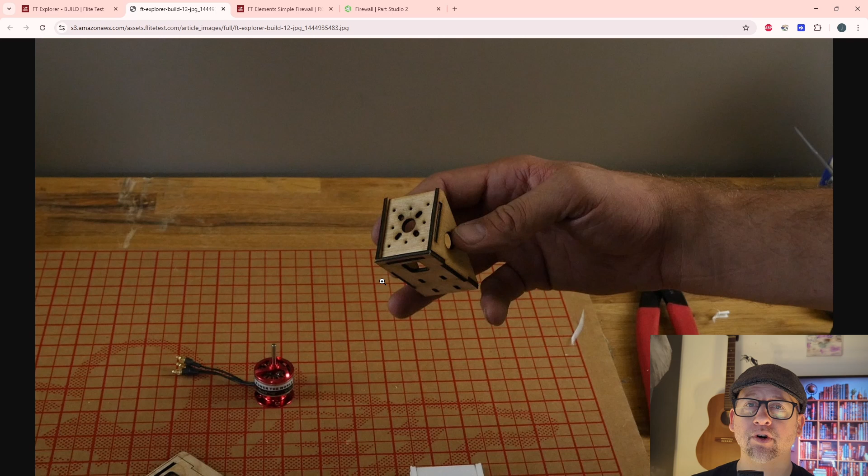There are some caveats to this. Heat may be generated from the motor and may cause the 3D printed firewall to melt. So we want to make sure we print this out of a material that can withstand the heat, or we need to create some air ducts around this in the fuselage of the plane to allow for airflow within the firewall and for the motor to get cooled down. I'm not sure if this is going to work, but I'm going to try it and test it out and 3D print this myself.

So I took the plans from one of their downloadable free Explorer planes, and this firewall is reusable in a lot of their platforms. So let's get started. Here we have OnShape free version, and if you want to download this file for free, you can grab it from OnShape. You just look for firewall and you should be able to find it. It should be under the public domain.

Okay, so now we're going to start on the front, and then we're going to create a sketch on the front view. We can hide the right and top view just by clicking on the eyeball for right and top view. Then we're going to click over here on the front, and get nice and centered. Now we're going to insert our image.

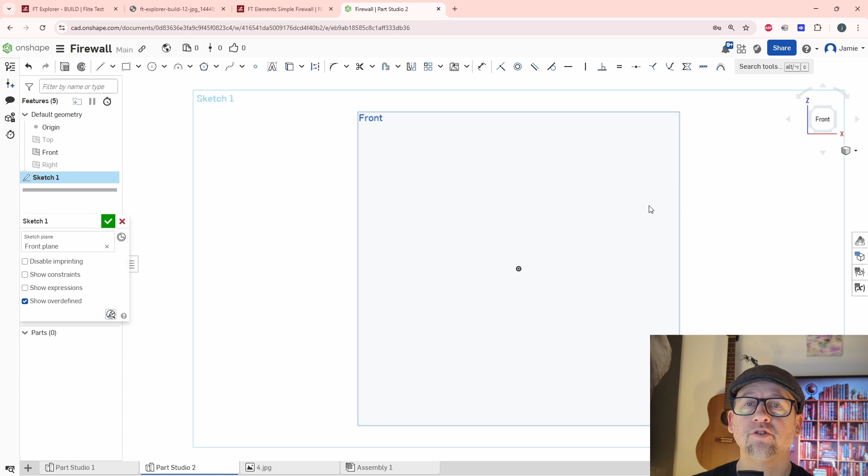So we're going to go up here to insert image. We'll go through here and look for import, and go with right here. It's going to be number 4, insert. So it inserts this item, a 2D image file from the Flite Test website.

So let's grab this guy right here. We did a copy right here. We're going to go down and click on this, and then click on this, and give it our approximate size.

And to scale this is how we will scale it. We will use the centimeters here. So this is 10 centimeters, so it's 100 millimeters. So I will create a line, and I will start with L for line.

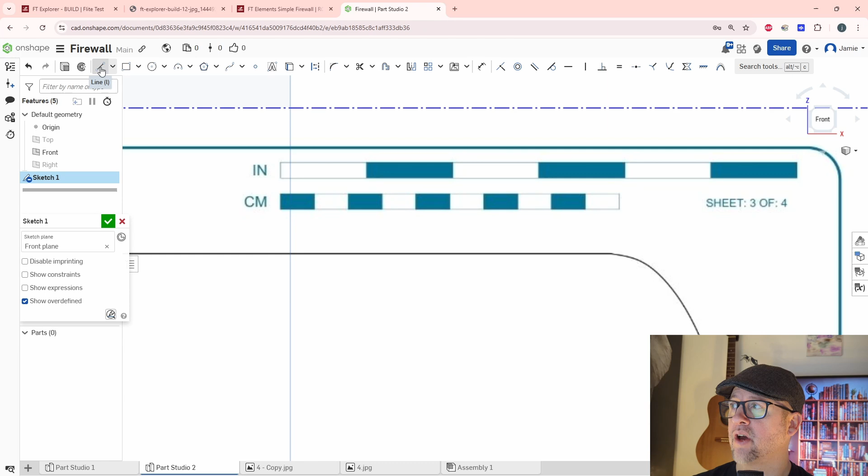So we can click that, or we can click L. I like to click L. So I'm going to hit L, create this line, and then we'll get off of it by clicking L. L to start it, create it, L to click off of it.

Okay, and now we're going to go with dimension. We go over here for dimension, hit D for a shortcut, or we can click on the thing. So here to here, and we know this is 100 millimeters. As soon as I do this, this item will scale, and we will see it looks much different now. So now we are at 100 millimeters, and our general size should be correctly scaled now.

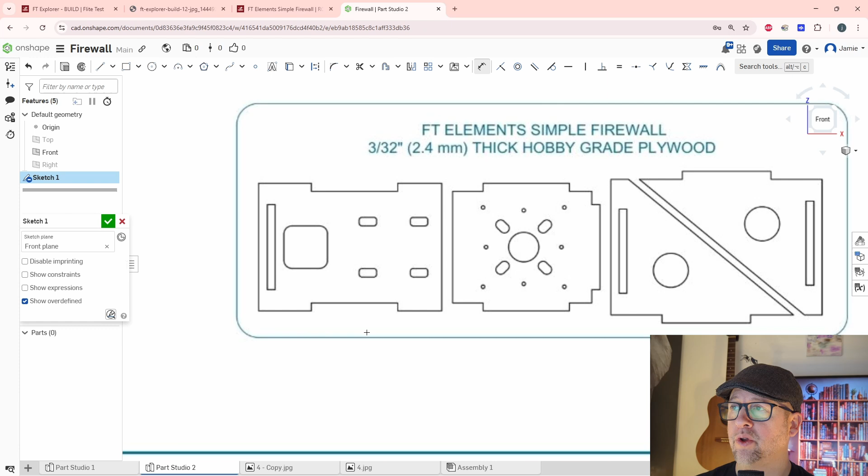Now we will go into the firewall. So this is 3 pieces of firewall. Originally they cut this out with plywood, but we'll be using 3D printed plastic. When I build this, all I gotta think about is this is kind of the bottom, and this is the sidewall right here. So let's look at that sidewall - the sidewall right here, then we got the bottom half. So we just need to build it together.

We don't have to build this exactly as it has here. I'd like to duplicate all of this, that would be nice. And then this here, we can just throw it in, that's not a big deal. That's just the sidewalls, so we can modify and make those any way we want.

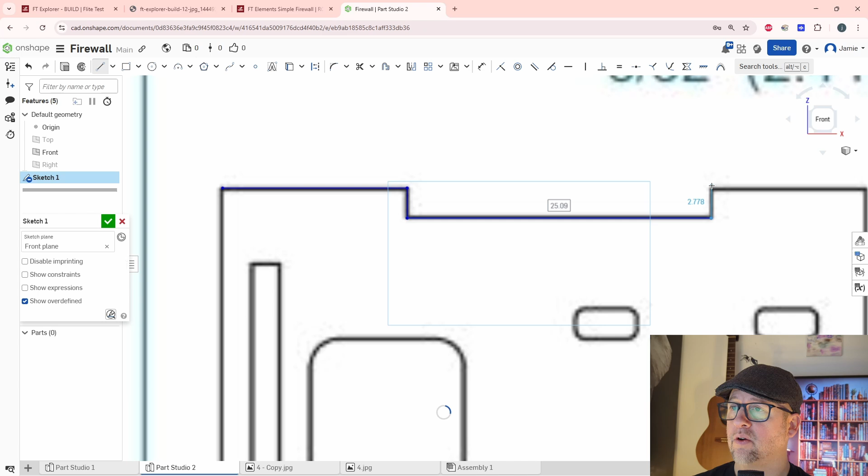Okay, so let's start with this guy right here. This is the very bottom, these probably are like mounting pads. So let's do a line, and we're going to just start with a line all the way around this guy, and we can just follow the contour of this, and we'll do like this. To make things a little more simple, I'm going to click out of this, L to click out of that. Then we're going to click L here, go all the way down.

Okay, get out of that. Now I'm going to create a center point, a center line. So this center line is going to go from here all the way over here.

And it doesn't actually look centered yet, so I'm going to grab this and find out the actual dimension size of this. So from here to here, and I'm going to divide it by 2.

38. Okay, and I want actually this to be the more precise one. This can move up, I'm not so worried about it.

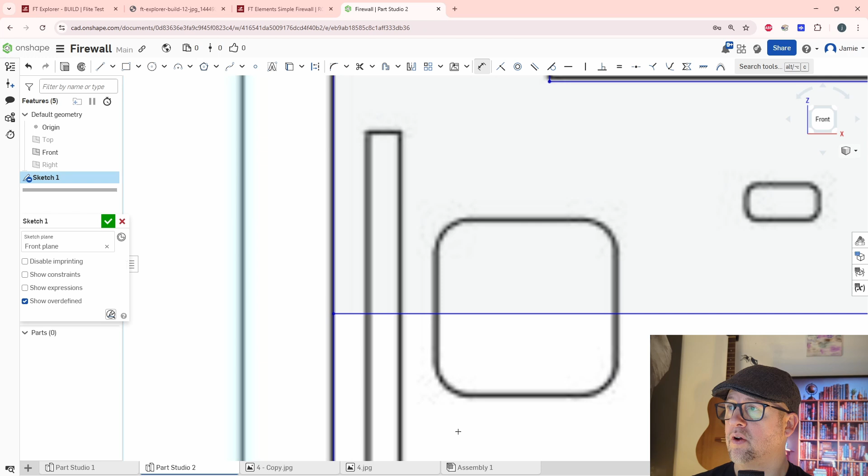This should be moving up. Come on, move up. Nope. I want this to move up. Let me click this line.

So as soon as this is in place, it will lock you down. It won't allow you to move anything. So uncheck that guy right there.

Okay, now I will do this, 38 divided by 2, and that will set this guy for me. Here to here. Here to here. Oh, it's thinking.

Let's give it a second. Okay, so we can put some basic math in here. 38 divided by 2, and it will automatically configure it for us.

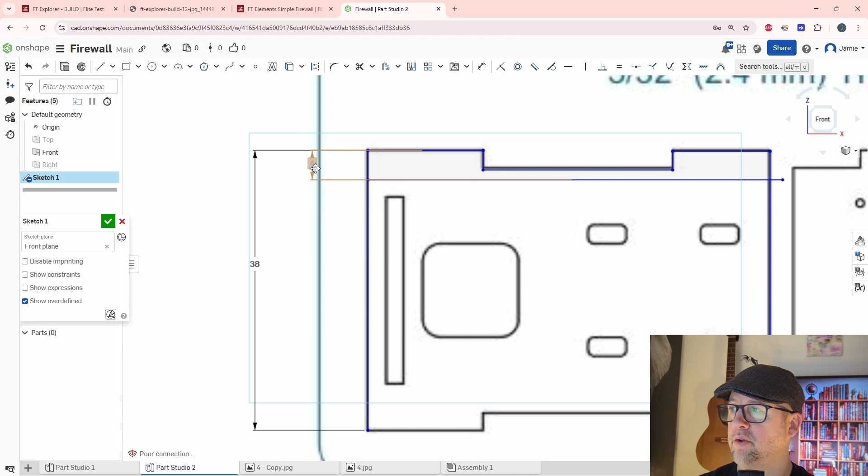Don't know why it did that. I must have typed something wrong. Let's try that again. I'm going to Control Z to get back to normal. Okay, and then we'll do this again. 38 divided by 2. There we go, 19.

Perfect. All right, so what we're going to do is we're going to do half of this, and then the other half, we'll do a mirror. So let's get started on this guy.

We want this right here. We want to create this edge. Okay, we can go past, we'll clean this up after. And then right here we'll click and we'll just kind of drag a box to approximate the size right here.

Perfect. Now we're going to do the same thing here. And for this I'm going to do some transforms and just move it over, or I can do another mirror function to get that one the same.

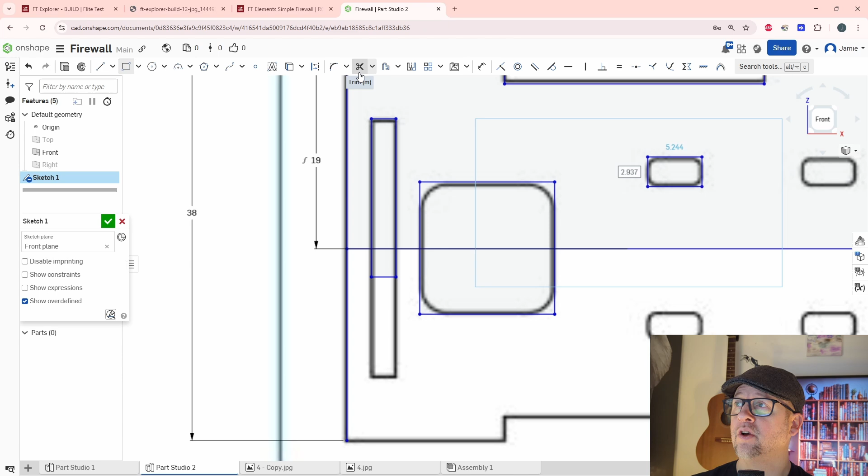So now some of these lines are passed. What I can do in here is I can do a trim. So my trim function is here, right here. We're gonna use trim, M for short, okay?

But what we can do is we can hover over right at these guys, trim those out, trim this guy. We can trim that, okay? And then all of this is okay, trim that guy, trim this guy. All right, so we are exactly half of this.

Now we're gonna just make sure everything's perfect on this side, and then we'll mirror it over here. So let's start with the first area. Let's get out of trim.

Let's move this guy up. Okay, we can control these guys and constrain them if we want to.

That's the better practice, but for this purpose, I don't think it's really necessary. If you ever want to modify this, make it better, bigger, scale it or whatnot, then you could put some dimensioning on here. But right now, I'm just going to concentrate on getting these things done.

Okay, I'm going to put a fillet on here. I'm going to move this edge over, just kind of double checking things. I'm going to put a sketch fillet right here, and that sketch fillet is.

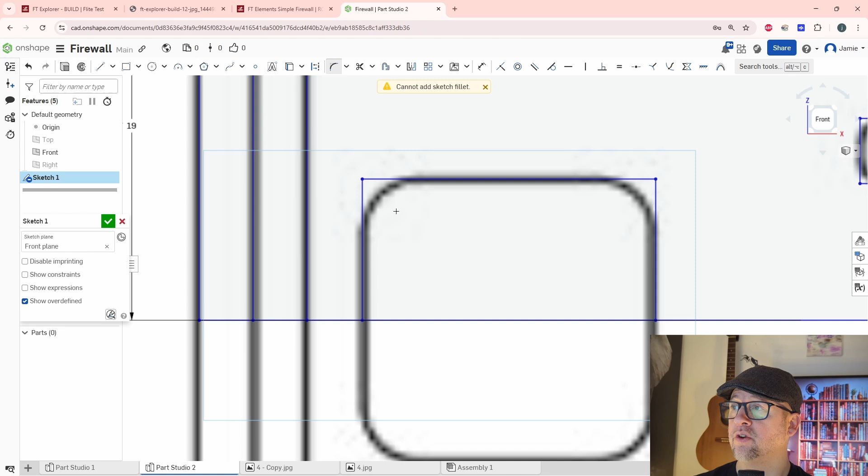Let me do it again. Sometimes it didn't pick the first one. Now I should be able to click, left click, and then add a number. So let's do a 2.

I'm going to pull this guy back up. Okay, it won't let me pull up until I get out of that guy. So let's pull it back up. We're going to do a 2 on this guy.

I should have remembered what the last one is. Perfect, that's what it did. Okay. 2, just 2. There we go. Perfect. All right, and we'll get out of that.

So now we can go fix that line. Now we're going to create like a 0.25 here. It may try to remember that one, but let's see what it does. We're going to redo it.

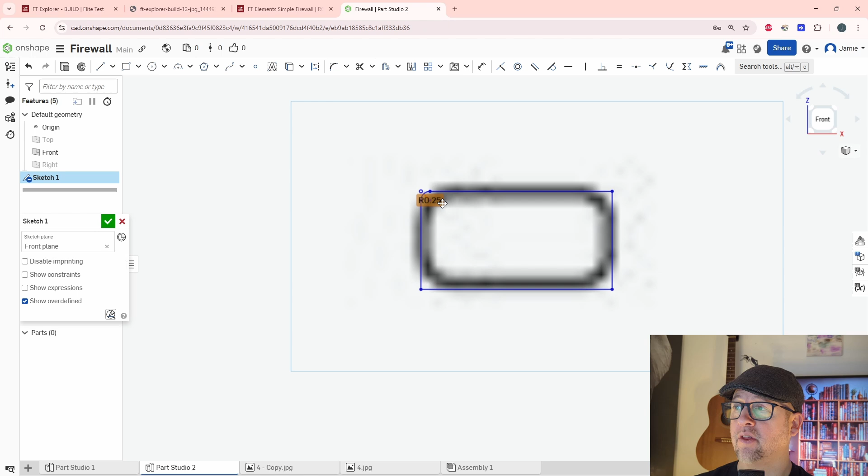So in this one, we're going to do 0.25. We're going to pull this back up. And the reason it's jumping around is because it is not constrained. If these are blue, they are not constrained. If they are black, they are fully constrained. Let's try a 1. No. Okay, I'm going to constrain this so this doesn't move as much.

So just a couple dimensions will constrain it. Here to here, okay, and we can do 9, and then we can do a dimension from here all the way over to here. We can do 29, just sticking with what's close to the number.

And that now we can change this, and it shouldn't modify it much. Let me get out of this dimension, double click on that guy, 0.5. It moved this guy. Why? I thought we set that guy. It must have moved the other side. Let's check. Control Z. Why did it move that 29?

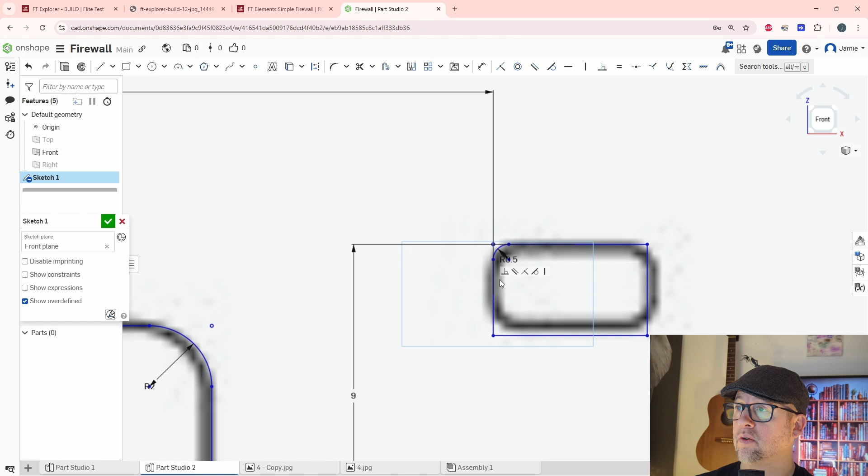Okay, it shouldn't have moved it because it's locked into position. Unless, okay, let's hit this and let's hit vertical. You know what? It's moving that line. That's why. Okay, we're gonna undo a couple times.

If we want this line to be stuck into place, we'll have to dimension this point right here all the way to the origin, which is way over here. Okay, so that's like the master origin location. Now we can click one more dimension from here, and we can go to this, and let's get right, perfect. Enter, get out of that dimension.

Now this thing should not move, okay? And I can actually, yeah, those dimensions should not move anymore. So now let's try this guy again. All right, and yep, you see how he's locked? He's black. That means he's locked in place.

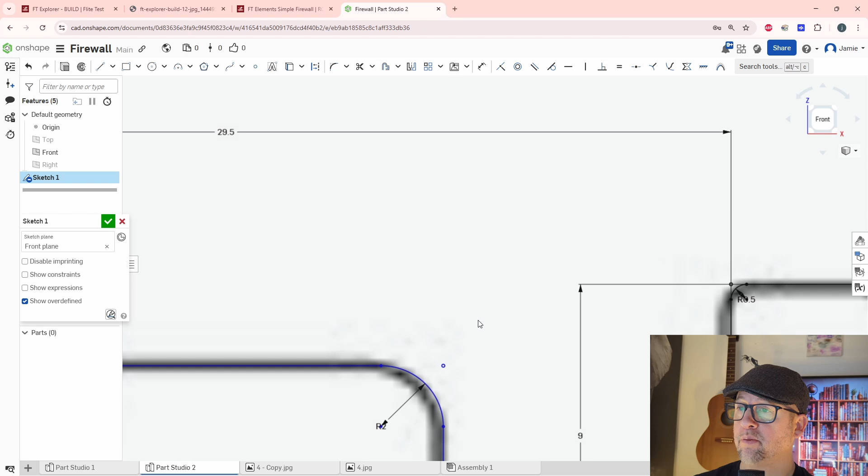So now I want to, how's this guy look? He's good, perfect. We're gonna move this to 29.5. And then that might be a little bit too big, so 29.25. Put 2 in here. Okay. All right. So that, yeah, that's about it.

And then we can go size-wise here. 5 millimeters. Let's do 5.25. Yeah, a little better. Yep, perfect.

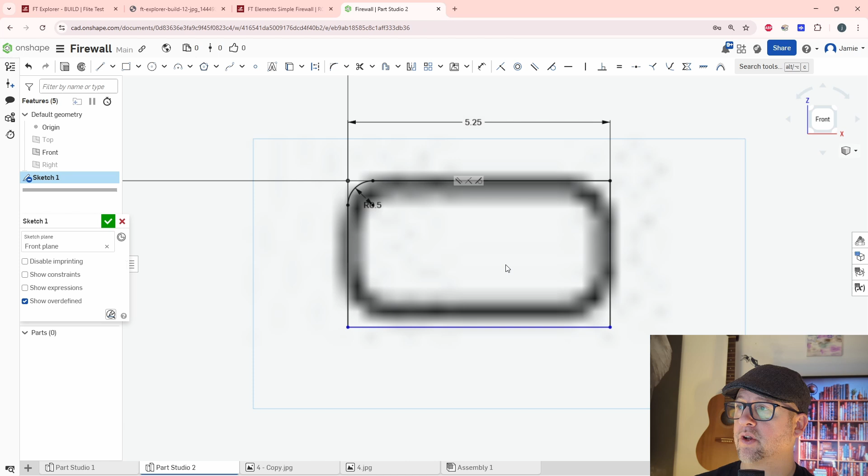All right, so now we're gonna add these, and then we're gonna add this size. So here to here is 3. I'm gonna go a little bit, take that off, go change this to 2.75. Yep, perfect. See how those are still stuck in position.

That's great. Now we can do a sketch fillet here. So we're gonna do the same as the other one, 0.5, 0.5. We're gonna do this one, 0.5. Perfect. Space bar, nope. Escape, like fix that. Fillet, there we go. Perfect. Enter, perfect, there we go.

All right, so now we want to move that one over here. We check the other ones where everything looks good. So let's do a move. Let's get out of this guy. Let's do a move. We'll do a transform this guy.

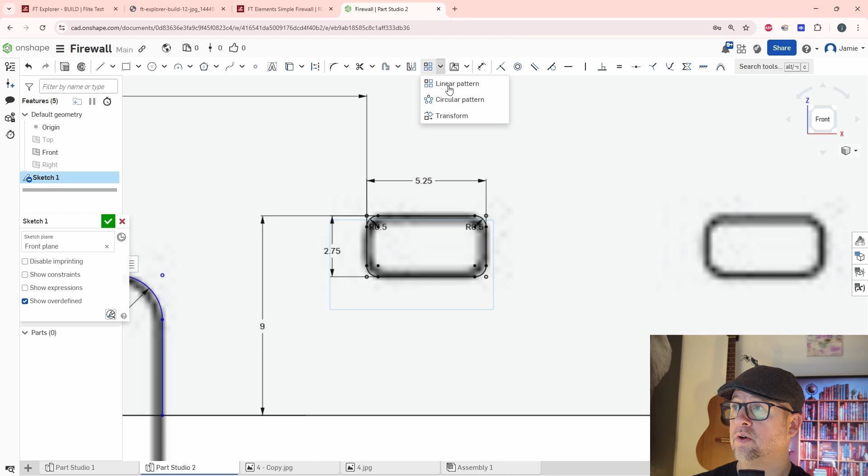So we can transform this guy. We have to select on all of it. Let's see if it allows me. Yeah, it does. Okay. So I can select all of it, and then I can just drag this over. So you see how it's just made an identical copy, which is exactly what we want.

We're going to place it. It's 14.88. We can actually say this is like 14.75. No, let's try 15. All right. Let's try 8.5. 9.5. All right, I'm just going to try 15. There we go. Looks a little bit odd, so all right, 14.9. Perfect. Yeah, that'd do it. That's perfect. All right, see, now we're done.

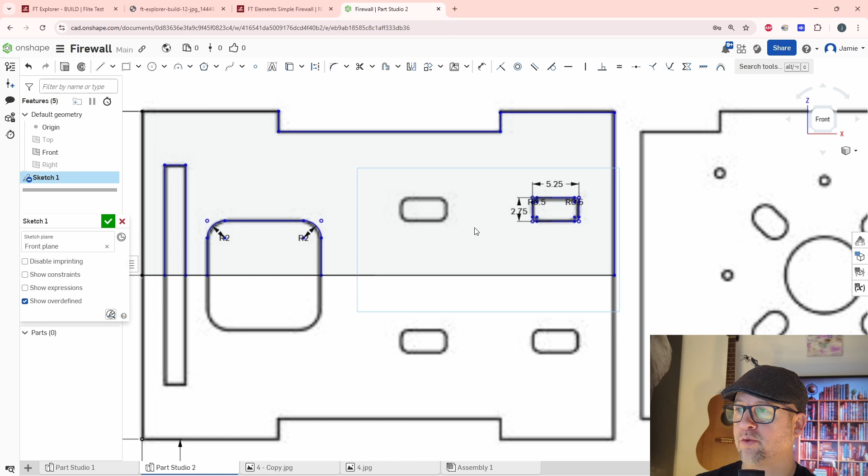Now we're gonna get out of, I'm gonna hit middle mouse button, escape. Just trying to get it to complete. Oh, guess what it did? It moved it. Undo that, Control Z. Let's redo that again. So we're gonna do a transform.

This time on transform, we're gonna highlight over the things we want to do. And there should be a copy function. I'm not seeing a copy. All right, we're not going to use transform.

We're going to use a mirror. So I'm going to create a line between this guy and this guy. I'm going to find the approximate center. Okay, hit my L to get out of there. L, create a line from here to here. Okay, and then L from, see that little dot, Morse code looking thing, that means midpoint.

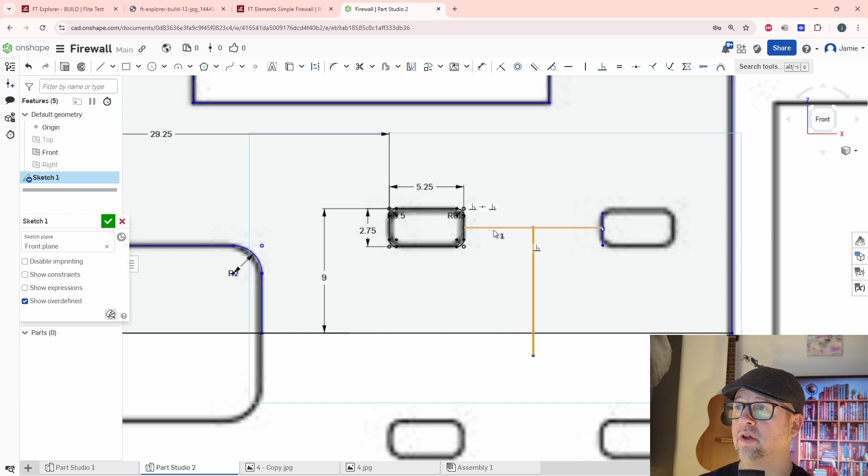Perfect. I'm going to take it straight down. Okay, L to get out of that, and I'm going to make this a construction line. Construction line means it won't reproduce it. So that one and this one will both become construction lines. Are dotted now. Okay, now we're going to get out of construction.

So it won't mirror with them. It won't mirror those items if they're in the construction, which is I need to do again. There we go. Okay, now they are construction. Perfect. See that dotted line is what we want.

Now I want to mirror this guy about this line right here. So let's go with mirror. Select the mirror line, this guy. Select the entities, which is this guy right here. And you see how I automatically did it. Now we got that last line right there, we can get rid of that guy.

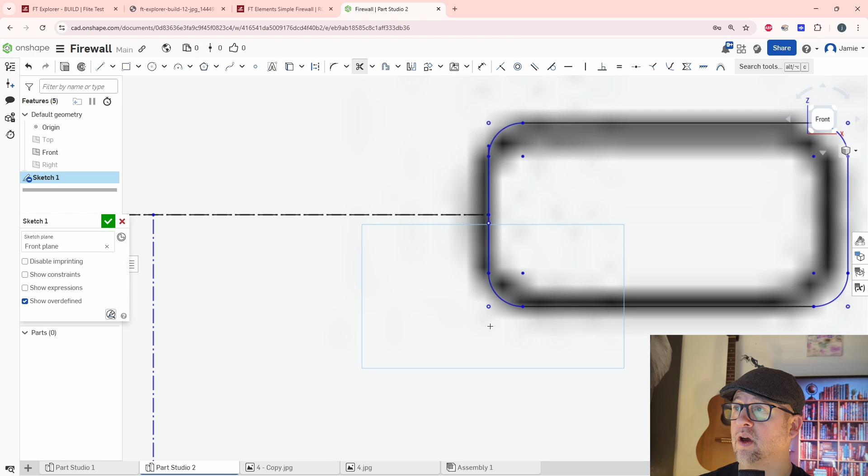I'm just going to hit space bar to get out of that, and we're going to hit our trim. Trim that guy, trim that guy. Okay, looks like another guy's over here, we'll trim that.

So we got our size. Looks a little bit off, we can probably adjust that. Let's get off this trim, and we will grab this and slide this guy in. Perfect, that looks great, we can actually add a dimension now to this.

So we said it should be like 9.8, 9 point, let's change that. We're gonna click here off of that. 9.7, there's, it's looking better. 9.6, let's try 9.6.

Perfect. All right, so now we want to mirror all of this stuff into down here, and now that I have this, I should be able to, yeah I think we're good here. I'm going to make this a construction line, we should be able to mirror about it.

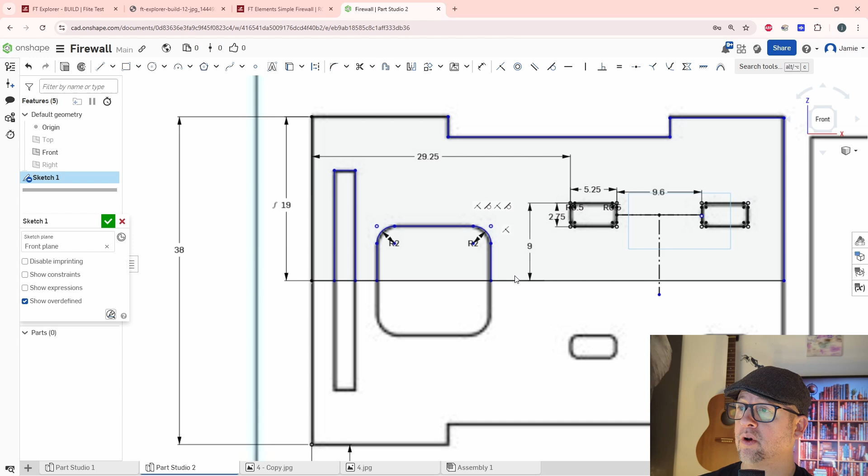So click this line, I want to do a construction of that guy, I don't want him to be copied. And then I'm going to escape out. And I'm going to trim the, oh, I don't need to trim that because it's a construction line.

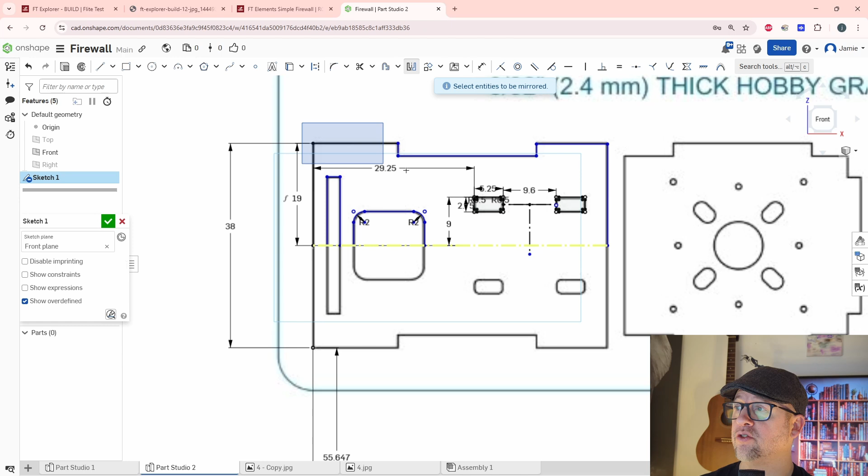So let's do our mirror function. Here's mirror, select the line to mirror, select the entities to mirror, so all of these guys. Okay, it's thinking. All right, looks like it did everything we wanted.

The only thing, did it do a line there? It sure did, there's a line there. All right, so we're good. Get off a mirror, we are totally done.

It didn't seem to mirror those guys, so I can actually go back in here. Where's my mirror? Mirror this guy. So let's do mirror again. We're gonna use this as the line to mirror from, and then, yep, okay, so it did those two.

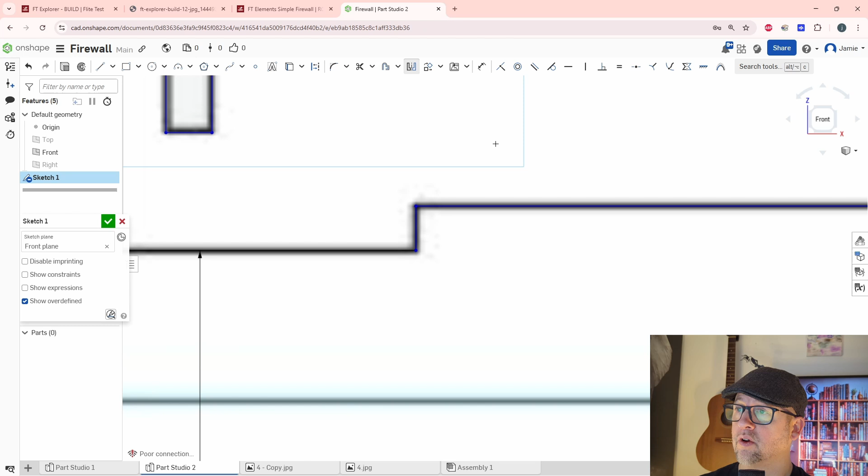There we go, we are good to go. Did it create that line? No, that looks like, I'm gonna do this line right here. And yeah, that's done. So for some reason it didn't pick those lines, but I found that and fixed it.

So now we can extrude that. But let's go over here and create this edge right here. So we're going to create this one, and then we're going to build it and then rotate it about this line right here and match this shape right here into this corner right here.

So yeah, let's try that. Let's start building this guy. I'm going to do the same thing, and I'm going to take this construction line and just extend it out. Okay, L to get out of that. And we can hit this construction, okay.

Spacebar to get out of that. And now I'm going to build a bunch of lines here, because these are on angles. I want everything like a 90-degree angle, 45s and 90s. So let's start with this.

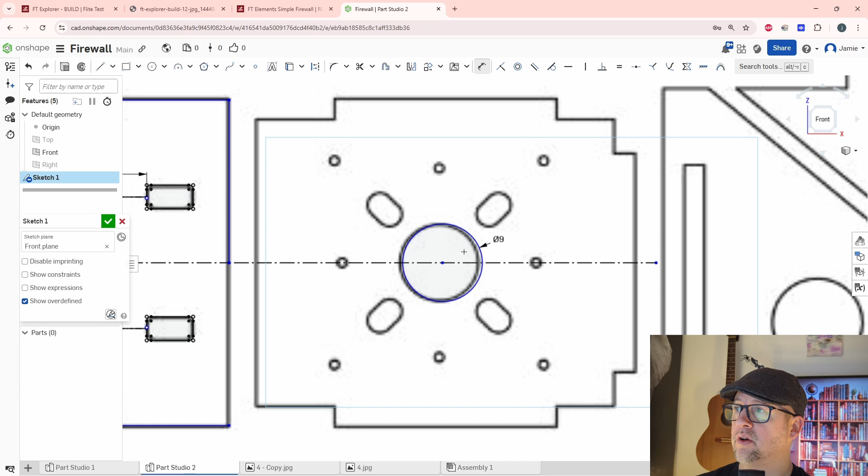Okay, we're going to start a circle. We're just going to pick around the center of the circle, and then we can choose the size with the dimension over here. So dimension this guy, we're going to make it 9mm, and then we can grab this center here and move it around a little bit. All right, get out of the dimension before we can move it. We'll move it over, perfect. There we go, looks great.

Now we're going to get a line. We're going to go from this point right here. I'm just going to create a nice straight line all the way through everything. And L to get out of that, and I can tweak this a little bit. I should get L to get out of that. Undo, Control Z to get rid of that. It should allow me, yeah, there we go. It just lets me grab it and slide it around.

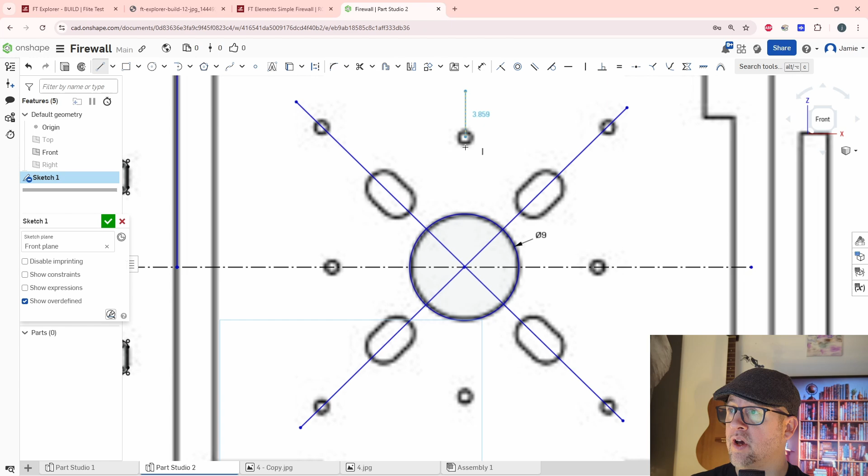Okay, so that should do that. Now I'm going to create another line from here all the way through the other side. You can hold down your shift key and it won't snap to anything, which is great. L to get out of line, L to get back in line. Then we're going to go straight down here. Yep, okay, L to get out, L to start, we're already good there.

We get a line. So what we're going to do is build one of these, and then we can mirror this about this line right here. So these are construction lines. I can click all these guys right here and make these construction lines. Okay, get out of construction line.

And now I should be able to make this shape right here. We can make a box, an aligned rectangle box here. So we choose about here to here. We saw it went perpendicular, that's great. And then we can do it right there. Okay, we get out of that guy.

And now we will add some radii to it, so fillets, here we go. Let's check and see, 0.5, let's do 1mm.

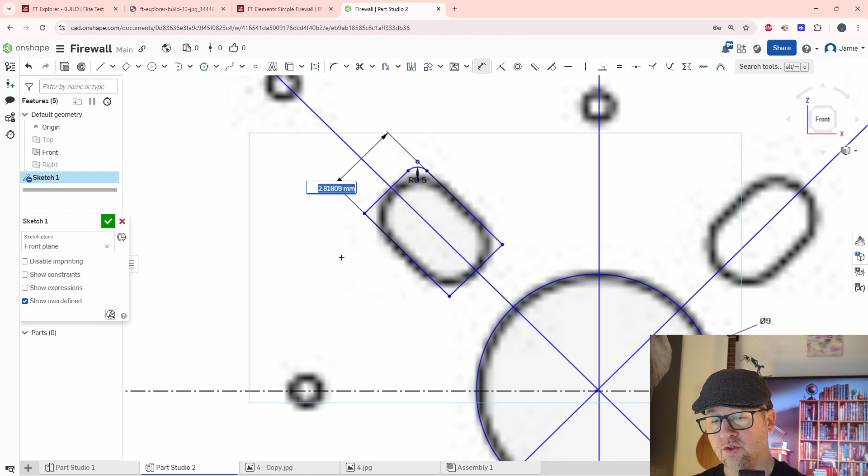Okay, it's moving things around, so let's snap this into position, and I will lock this guy into position by putting these down. So this is 2.8, nice even numbers, rounded, 4.5, perfect. Okay, so now we can adjust this a little better.

It shouldn't move, so we're gonna change this to a construction. Okay, get out of that. Construction, all these guys are construction lines. Perfect, hit that, get out of that construction. All right, now we should be able to adjust this and it shouldn't move around.

So 1 millimeter, it's still moved. It's not moving, let me go Control Z. Let me put another dimension to lock this guy. Wait, my construction lines disappeared. So click, okay, get out of that. Click, click, click, construction, get out of construction. Okay, enter, spacebar, there we go. Now they are construction, spacebar gets you out of it.

So now this should be locked in position. This one actually is floating because it's not actually locked. So now I can lock this guy in by doing this, and there we go, 1.4.

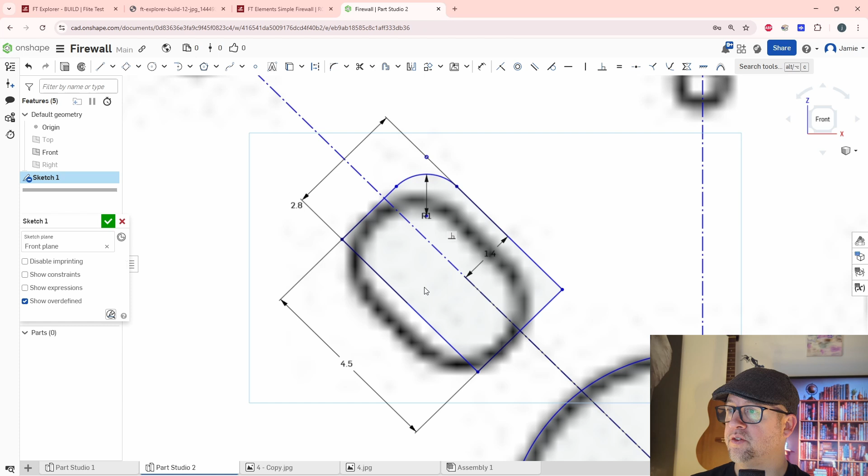Okay, so that's half of that, that's fine. So now this one should be locked in. This is not locked in, but let's check and see what happens if I do this guy. So let's get off of that dimension. Double click on that guy. Point, or let's go with 1 millimeter. Still moving it around because this left side's not locked in position.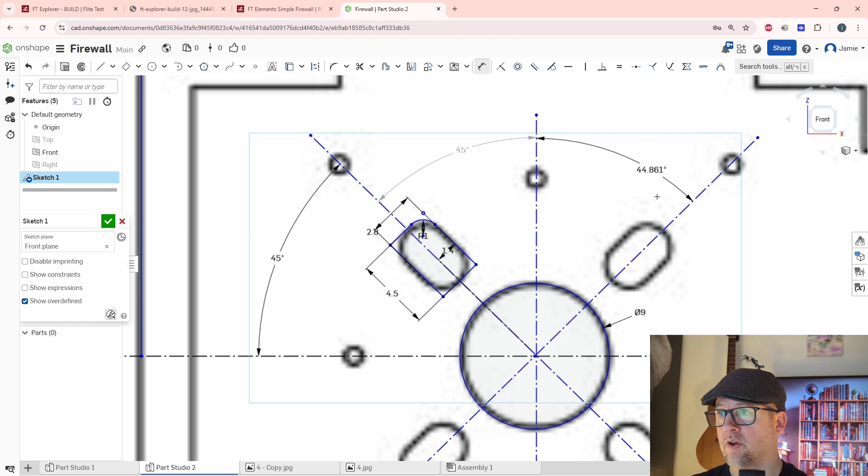Okay, it's thinking down here, let's give it a second. Perfect, okay, and then here to here 45, here to here 45. Perfect, all right, I think I did everything.

All right, now we can lock this guy into position by, here to here is 1.4. That's locked, now we can undo that. It's actually, when it turns into light gray, it kind of makes it to where it is reference only.

So let's lock this one. We're going to make this line black, and to do that we can add like a parallel. This line is parallel with this line, and then now we need to do a position distance from the bottom. So from this point, why is it going - here to here, 3.7, I'm sorry, 3.7.

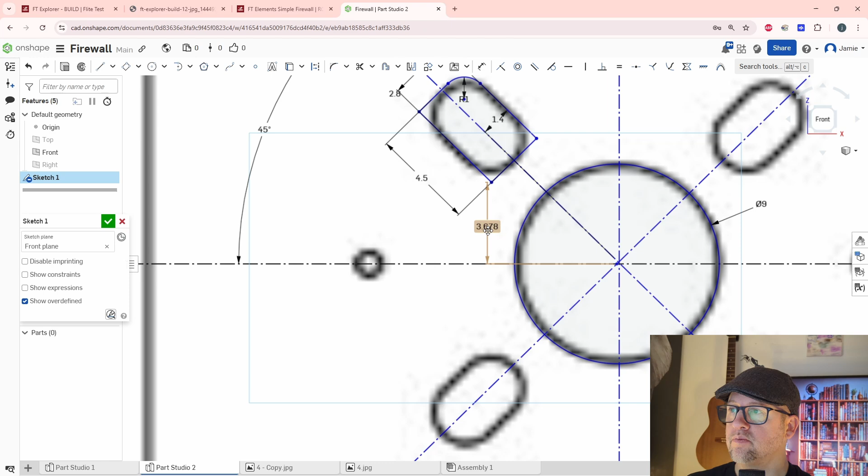Okay. Now I think we gotta lock that guy in, but let's check and see what happened. Okay, this one moved, so that's good. We don't want anything else to move. Okay, nothing moved there, good. Good. Good, perfect. All right, so we locked everything in position.

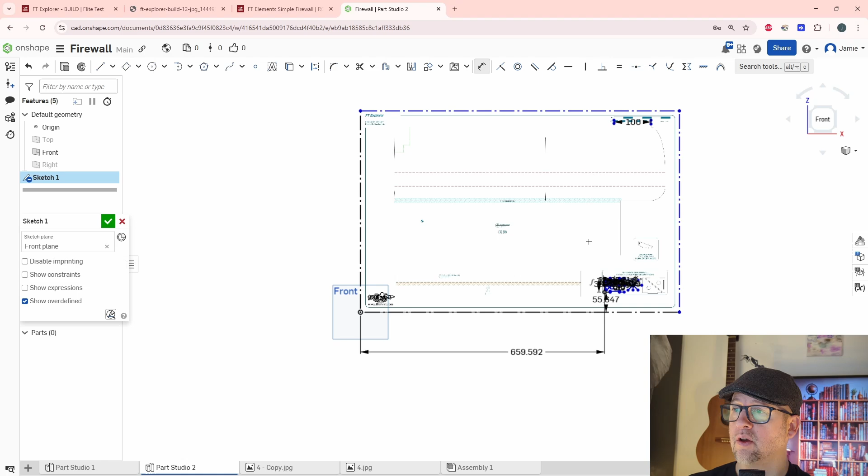We moved it all, and now we will start to do some mirrors, but let's get this guy right here first. So this is probably your mounting hole for your motor. Of course, different motors may have different size holes, so we'll just, right now I'm gonna make this a 1.5. Okay, just zoomed out, I can hit front, it could take me back. All right, so back to this guy.

Now I'm going to grab this geometry and do a mirror over to here. So yep, let's try that. Get out of this guy, go to mirror. This is our construction line. Our entities to be mirrored are these guys right here. Okay, and then you can see they automatically updated.

Perfect, so now I want to mirror them one more time. So I'm going to get out of this, and then I'm going to get back in the mirror. I'm going to choose this as my mirror line right here, this is my construction line. Okay, and then this is my entities to be mirrored, not construction line. Perfect, it looks like it did everything.

Okay, the only thing I don't like is all these little lines here. Something's odd about that. Everything should have been taken off that very first line, but okay, we'll go with this. We can move all of these. Should be able to say fixed point. Fixed.

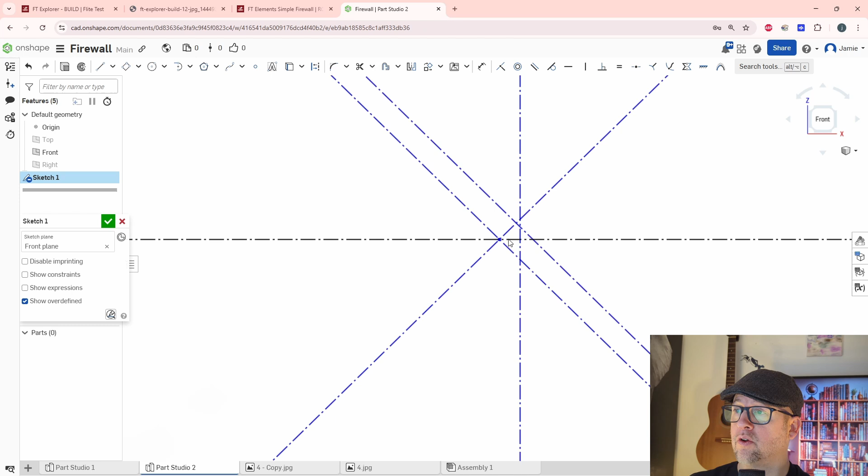There we go, look at that. Everything, it's like almost dead on. So that's what we want right there.

All right, so a couple more circles. This is a 1.5 millimeter. Just gonna duplicate that one. We can do a mirror if we wanted to. 1.5. Go back to circle. Okay, dimension, 1.5. Circle.

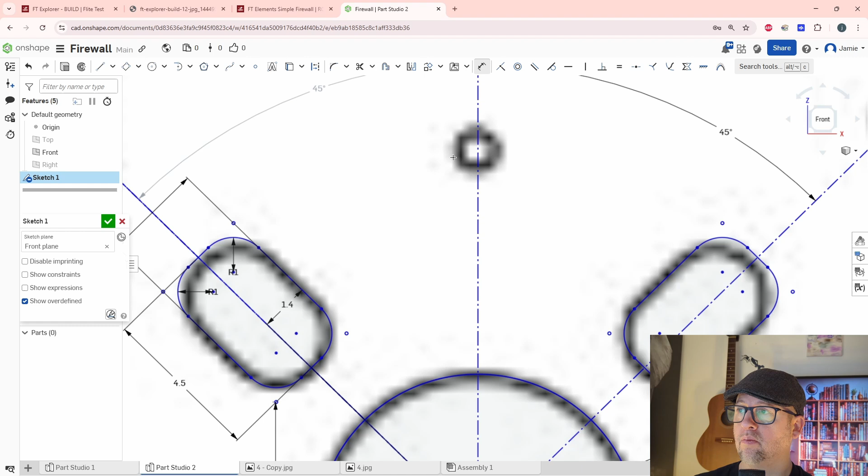Okay, we could do mirror if we wanted to, mirror about that line, or we could just drop another circle, whichever you think is best. 1.5.

Okay, next, let's create some of this extra geometry on the outside. So I like to use boxes, corner rectangles. Here's one, I'm just gonna take it approximately to the size I want. Okay, there we go. And now I'm gonna do some trims.

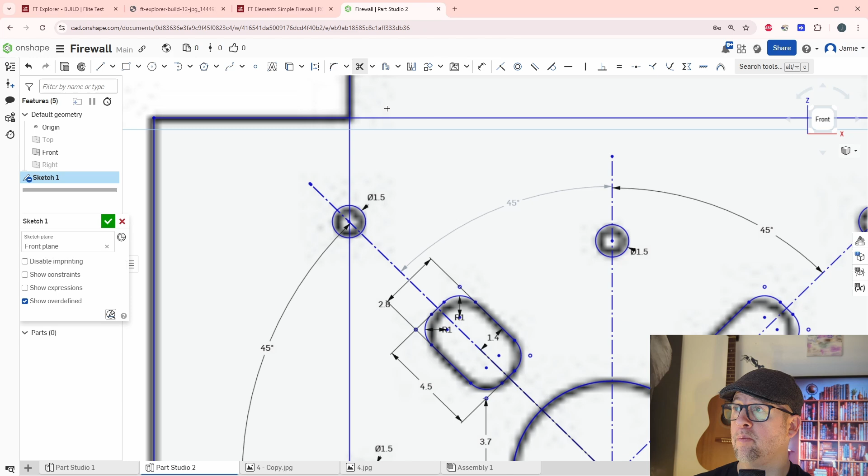So our trim function, that trim, hit M. Okay, look at it, went through all through the stuff. So we gotta go through and clean up each one of these. Okay, I can clean that, clean that. We can get rid of this stuff.

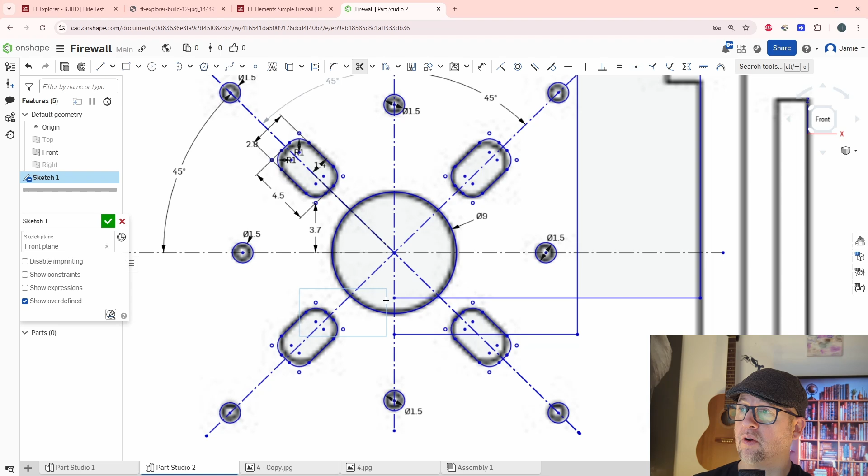Yeah, so that might have been a bigger pain in the butt than just tracing it out. So let's go back, let's undo. So I said originally, let's do those two squares. Never mind, because we have to do too many trim functions unless we didn't have a whole bunch of intersecting areas. If we did this first, it might have been better, but anyway, never mind.

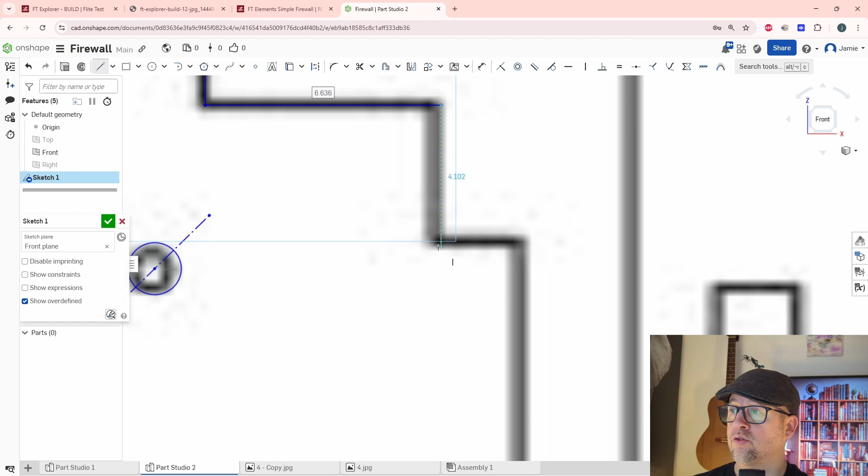Lessons learned. So I will do a trim, but I will just go down here and then I'll trim that after. Okay, notice these dimensions are not dead on, they're not perfect. It should be like 2.5, but I do want this perfectly straight. That's one thing I do want to make sure. Okay, go straight down, and I can adjust these after. See that it looks straight.

Okay, and then straight down, and then now I can get out of this, hit L, and I can hit my M key to get trim, trim that, and then trim this. This is a lot easier to trim those two.

What is it doing? Oh, it totally flipped the whole thing on me. All right, so to get back to that, I will do a slight rotation with my right mouse button, and then I'll go to my front, click right back on my front. So if anytime it does something silly like that, you can just click back, make sure you're on your front.

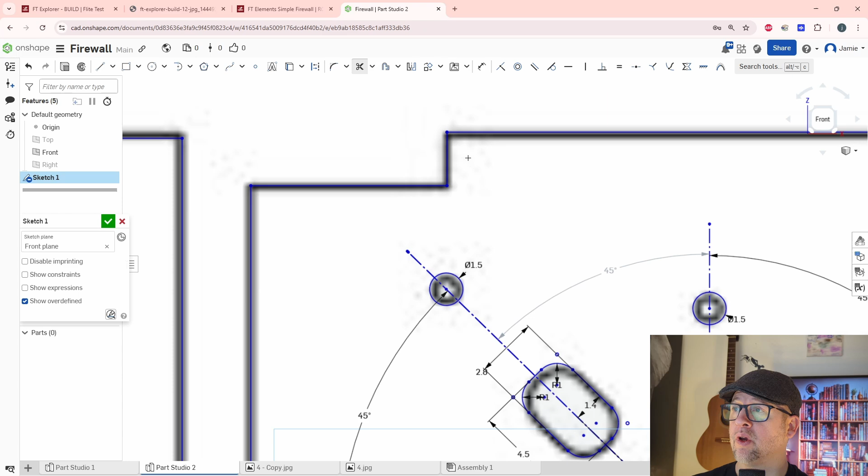So now we will go through and we'll look at anything, and if we want, we can modify things and combine them, whatever. So I know that this edge is going to match up with this edge right here. So I'm going to be doing a union feature.

So what I should do is I should just grab this and not hit M. I still had M on. Control Z, take off M. I should be able to just grab this and do that again. I thought I had M off. There we go, grab that and we can just pull that.

So in all actuality, this shape right here will be united to this guy right here once I move it over. So no problem there.

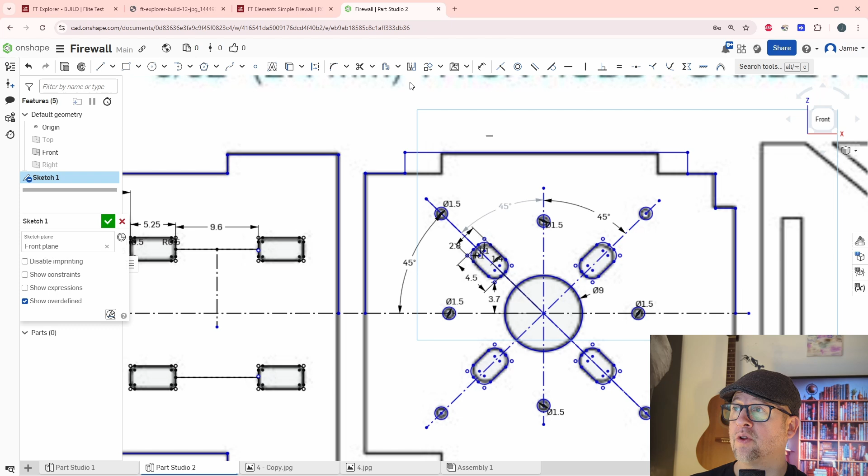All right, and I should be able to mirror all this geometry into the bottom. So let's do that, mirror. So we're gonna choose our mirror line, and then our geometry to mirror about is this guy and these guys. Okay, and then looks like everything's mirrored except for that guy. We'll click on that guy. We're still in the mirror function.

All right, we're good. Now we didn't match this up. Well, yep, like I said, we're gonna unite it. So okay, all done with that.

So now I can do two extrusions. So we're gonna extrude this, and we can make this as thick as you want. You know, I will reiterate and we'll discuss this again, that this maybe heat is going to be an issue with this. It is only, for me, I'm going to print it out in PLA and I'm going to test it.

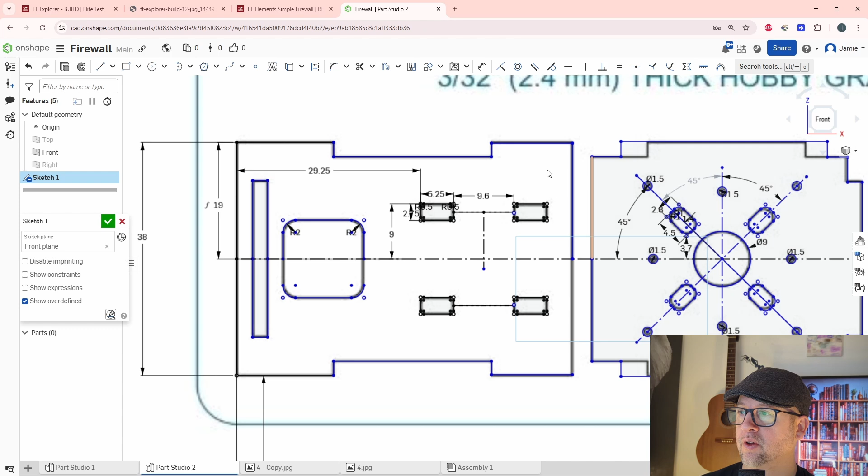If the PLA melts too easily or warps, the plane could potentially crash. So you may have to add resin, fiberglass, or something to make it less heat sensitive. The motors get hot, and that warmth may cause this part to warp or change shape. That's why I recommend making it out of a reinforced material, or adding fiberglass or carbon fiber. Okay, let's get started with extruding this firewall.

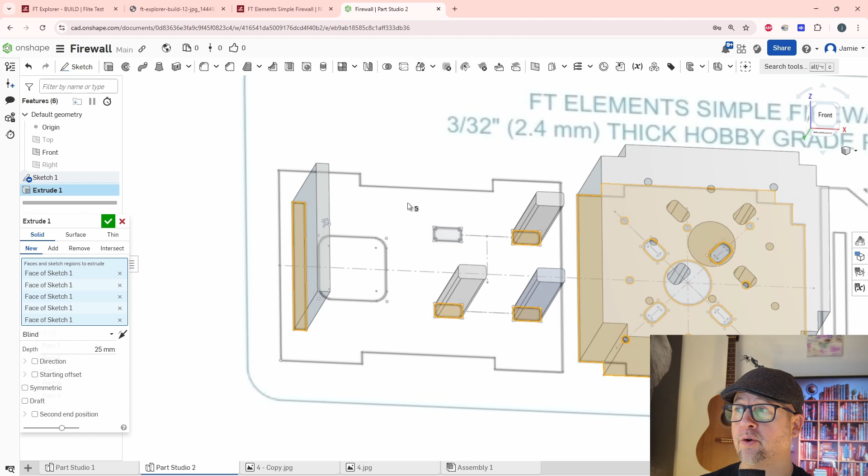Now I go to extrude here. It's extruding one already, and the little holes are doing the opposite of what I want. That means something is wrong with my model. It should have popped this out. So I'll go through and look for any broken edges or something odd on the outside.

Let's go back into my sketch and look for anything that looks odd. Look, one missing line. That might not work. All joking aside, let's check our mirror.

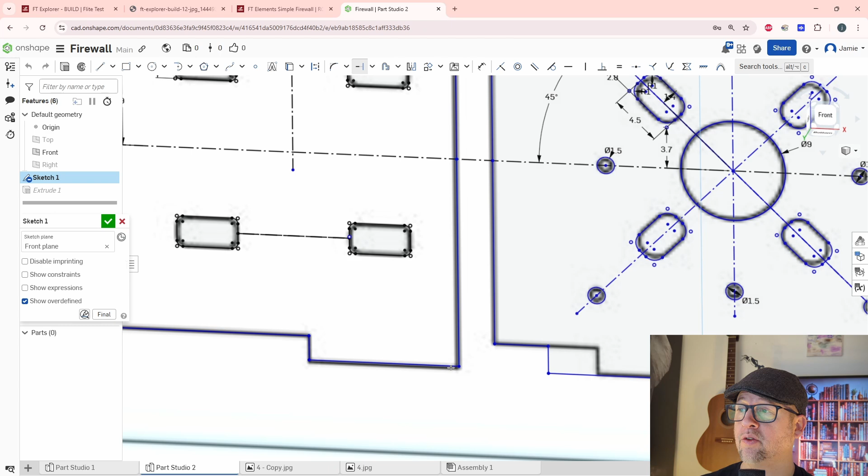Here's what we could do - we could just do an extend. We'll take this guy right here, extend it, pull it all the way down, and that extends it. Right click, escape, extend, and keep looking.

Everything looks good, but this line right here is missing, so we're going to do an extend there - here to here, here to here. Looks good. Get out of that extend, back to extrude.

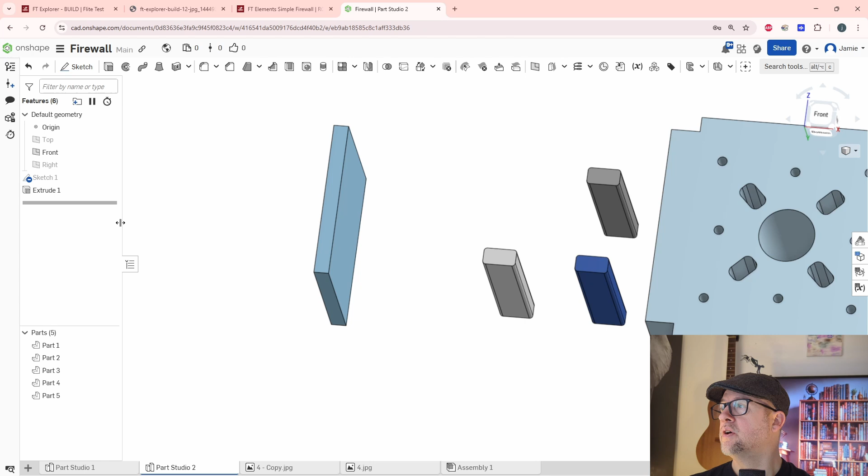You can see it looks much different now. I believe we can shift - let me get out of this and try the extrude again. Oh, it already extruded, that's why. I don't want that first extrude, I want to delete it. Okay, now we're back to where we were.

We're going to go back and extrude this. So now we extrude that, and extrude that. And how much do we want to extrude? Approximately 4 millimeters, I'm going to say. I think that'd be good.

Okay, this might be a little too thick. I think the recommended thickness was - let's see if they put it in here. So let's do A. All right, so 3/32 is approximately 2.5 millimeters. Let's try that, let's go with 2.5 first.

Okay, we have our two pieces now. Now we're going to rotate this and put it into that slot, matching up these holes. Let's try a transform - entity to transform this guy. Then transform, we're going to do a rotation by this line, 90 degrees. And we want it actually opposite of that, so flip it up, okay?

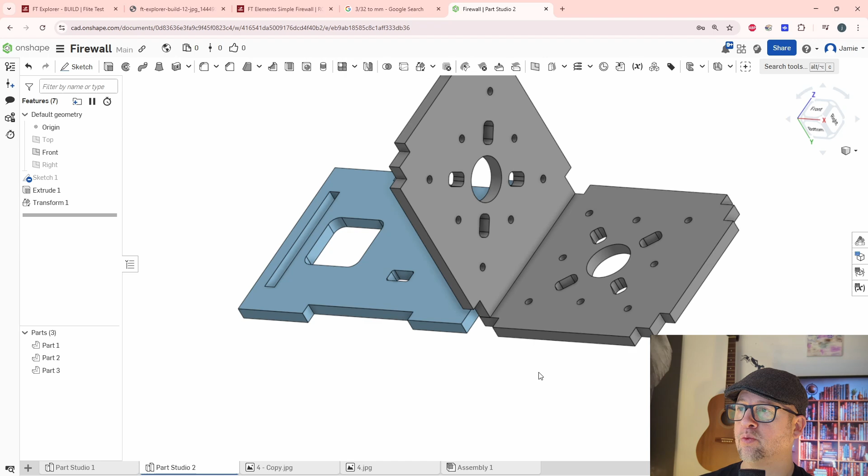And we can copy part if we want to - let's do that, sure. We can hide these parts if we want to, no problem. So it looks like we need to rotate this also. We want to rotate and grab this edge - or actually, does it even matter? I think they're symmetric as far as sizes go.

Okay, let's just take this all the way forward. So we're going to find a dimension - what's the dimension from this face to this face? And we're going to go in negative X. So 56, we can right click and copy that.

All right, then we can do a transform on this guy - transform by XYZ, and we're going to paste in here. It's going to be a negative 56. Okay, there it moved. Now actually I want to move it down 2.5 millimeters.

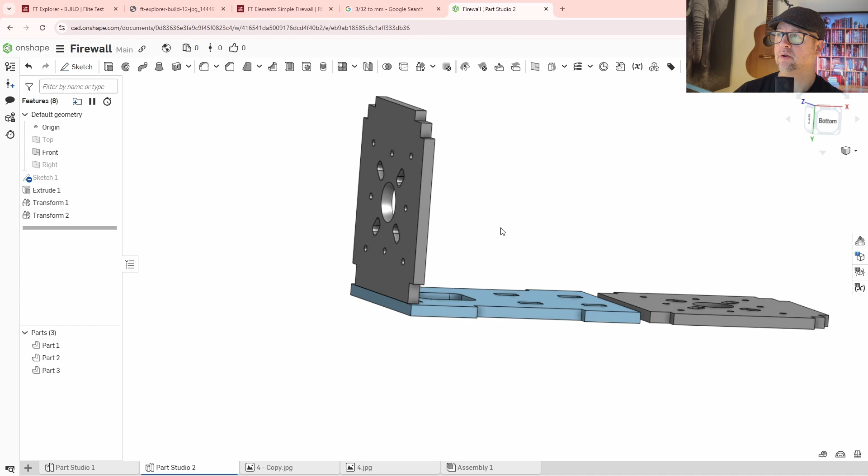Looks like they want me to have it within the slot right here, so let's check that slot thickness - and that's 2.37. All right, no problem. So what I'll do is just put it in there.

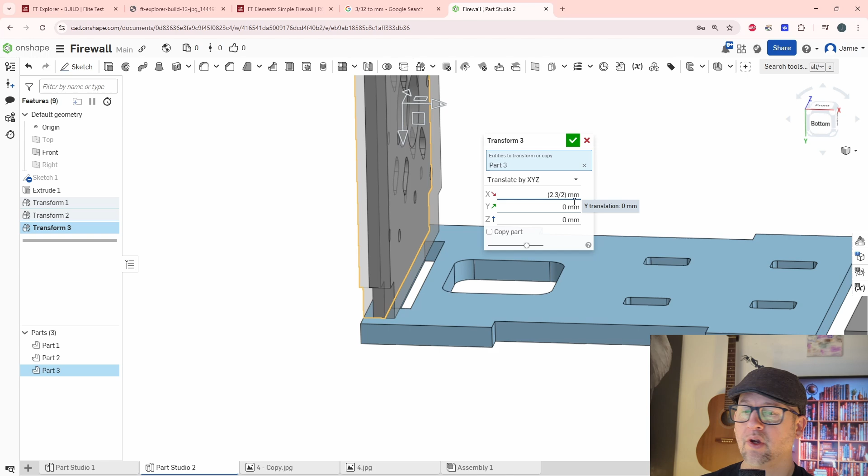So I'll transform this. It was 2.3 in the X. If I go 2.3 divided by 2, that should send me to the proper location. Oh, that's half, I'm sorry. So go 2.3 millimeters. There we go. It sets us approximately there. I did a rotation there, sorry about that.

Yep, so I can make that 2.4. We're just kind of fine tuning this, if it lets me. Why is it okay? 2.3, let's go with 2.35. Okay, 2.4 then. Come on.

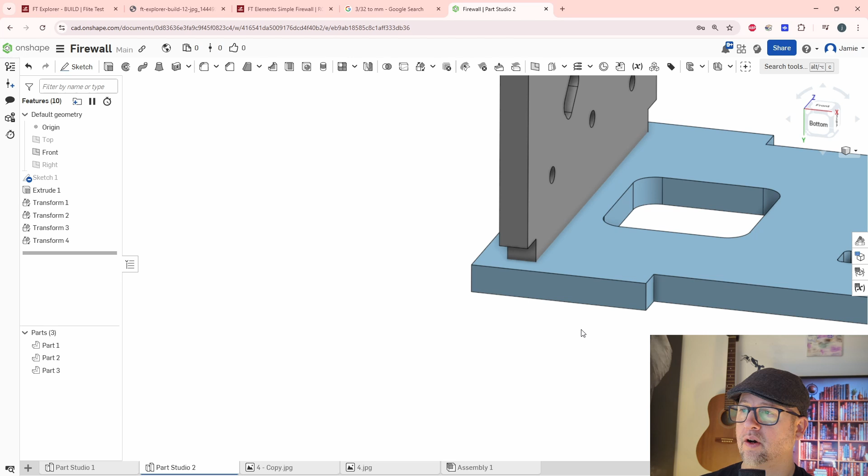Perfect, that looks great. Okay, now I want to go down 2.5 because I know the thickness of this is 2.5. So let's grab the transform again. We're going to take this entity and transform it in the XYZ. It's going to be a positive Y, so we're going straight down. So 2.5 straight down. Okay, now we look and we are all perfect. We're on there and we're good to go.

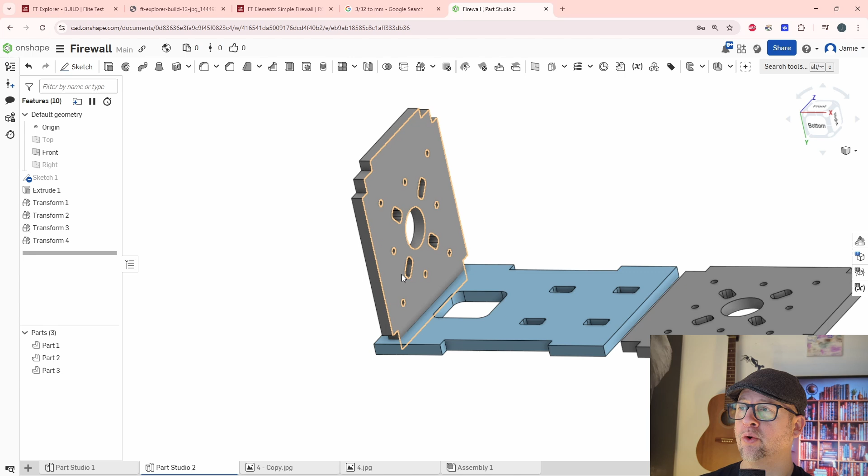So now the things we have maintained, let me go back to my front view. Okay, the things that we have maintained are the distances of these feet. This would be like mounting holes for the actual firewall, and these are the mounting holes for the motor itself. And of course, you can tweak these, make these better. Maybe the first print doesn't come out well, doesn't align with your motor. And of course, all this stuff is easily fixable.

So what I will do next is create another piece that goes from this edge to this edge. To do that, I'm going to build a sketch. In all actuality, I don't need this edge right here. We can actually modify and get rid of that, and there's a few other edges we can get rid of. But for the most part, I will continue on and build a wall using this line right here, and sketch on this face.

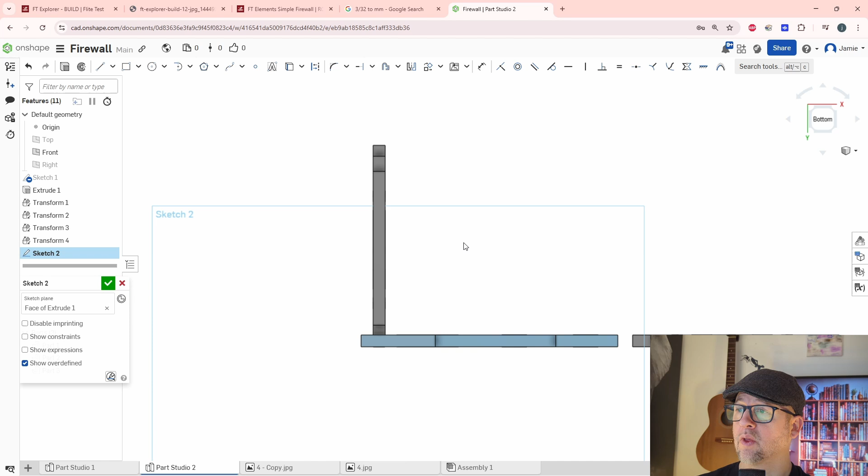Okay, and I can slide this guy over, it's out of my way. So now I should be able to see my new sketch 2 popped up. I'm on a bottom view. Okay, now I should be able to create a 45-degree angle going from here to here and fix this edge up. So let's try that.

Let's go with, let's create a box first. Let me click on that guy to this guy. And then I can do a 45 from this to here. That should do it. And if I need to lighten this up, I can put some holes inside of here and make it lighter.

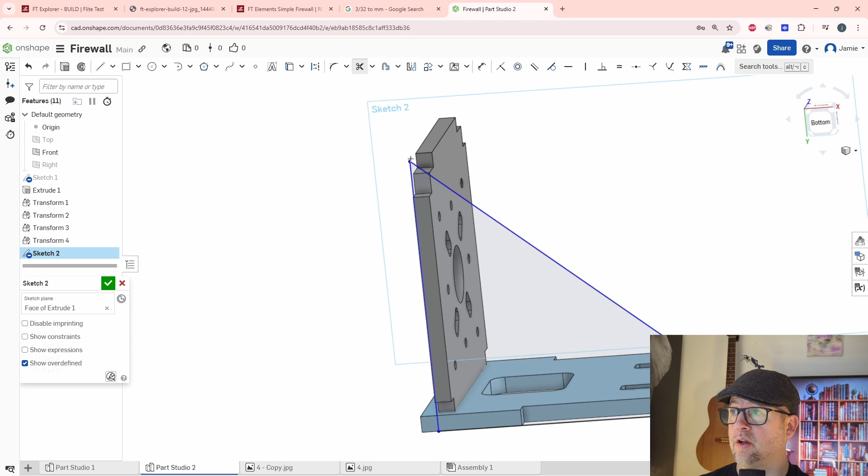So I should be able to do M trim, get rid of those two guys. And if I want to, I can flatten this guy off, but I think that might be okay. All right, so now I can hop out of this, end that sketch, I hit the green. All right, and now I can figure out how deep I want to take this.

So if I want to take it, I think it's probably 2.5 millimeters. Let's measure from this face to this face, and we're going in the Z direction. So we're at 2.4, we're going to round it up to 2.5. So let's go back, escape, and do extrude. Grab this guy, we're going to push from 2.5 the other way. So we're going to grab this here, go 2.5, and flip this arrow right here.

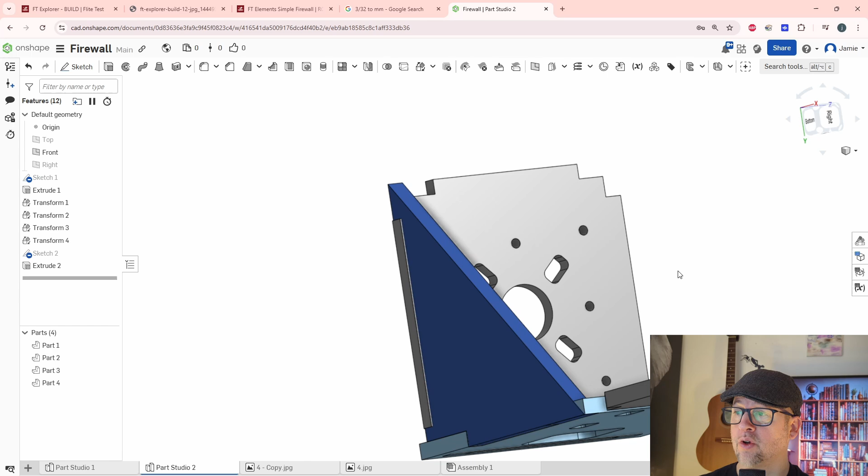And we're going with an add, okay? I'm sorry, not an add, a new, okay? And there we are, so we just created our new edge. It's flush with this one right here. It looks like it's not flush entirely with that one, and we can fix that in a second.

So because I just sketched this, it's going to grab that. The line at which I sketched this wasn't perfect because it was a little fuzzy. The line was from the imported image. Anyway, what I can do with this now is I can create a line in between here, and I can mirror this feature.

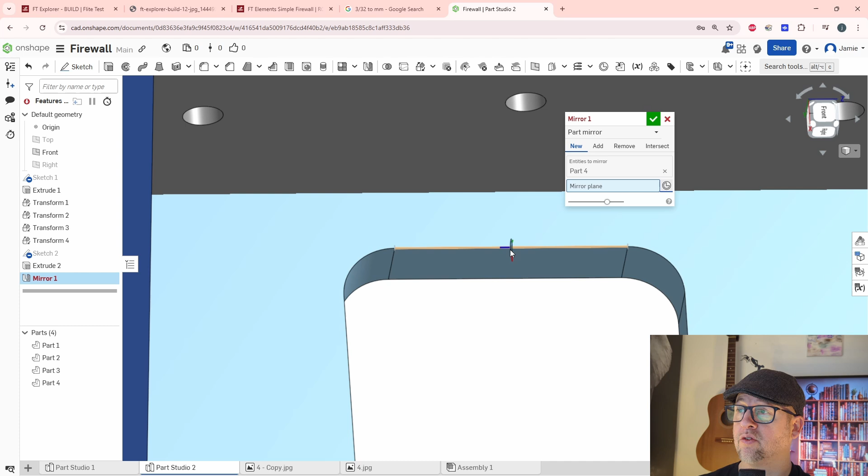Let's mirror this body, let's see if it'll mirror. So we want to mirror this guy and the mirror plane. I want to see if I can choose this guy right here. Yeah, so right there, I can see it's facing left and right, that's exactly what I want. And see, I just mirrored it. So now I can look, I can see that's where I want it. Created a new, yes, okay, go.

All right, so now we see this is a little goofy, but what I can do is actually tweak the sketch and make the sketch a little better. So I can line these two guys up in sketch, and that should fix that.

So let's clean this guy up. I can pull this edge out on my sketch too, and they should all be related. So remember, we're going to pull this edge out, and push this edge exactly the same edge as this.

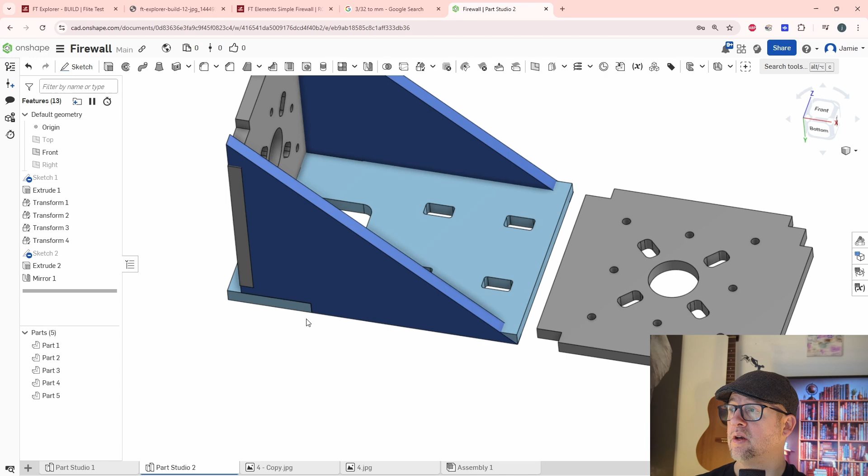Pull all these guys out, and then push this guy level with that guy. Okay, let's go back in the sketch. This is the cool thing about this software, is you can go back in your sketches and fix all this back up. So we're going to finish this guy.

We're going to trim this guy, M here, M here, M that. Okay, we can do an extend. Extend is X. So we're going to extend this guy to this guy. We just pulled this guy out, and then went down here. Now we're going to grab this guy and go all the way up. Do that again, grab this guy and go all the way up. Now they're stuck, perfect.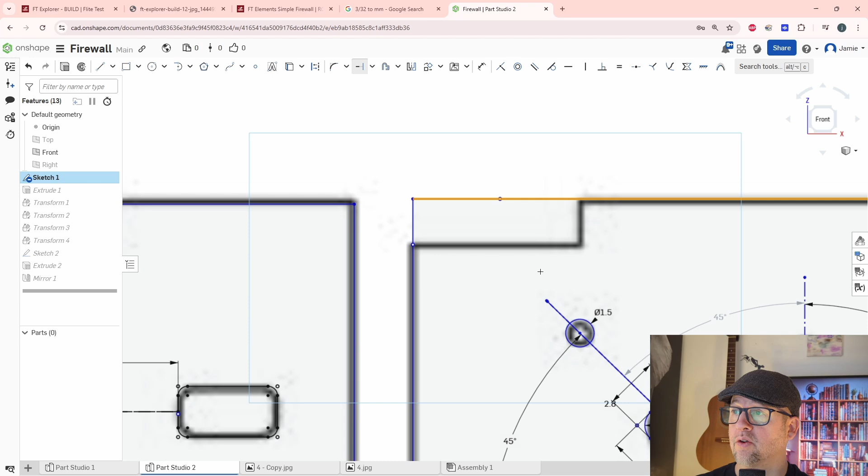I can right click, escape extend. Now we can do the same thing here. Let's just extend these two guys. I'm going to extend this guy to this guy, and then this guy to this guy. There we go, we're good. Now we're gonna hit M, which is to trim all these guys. Okay, and then we can get in here and trim out these little circles.

Perfect. So now, one goofy thing is in Sketch, our mirror functions, our mirror sketches, they don't actually take. So what we can do is mirror this guy and this guy and this guy. Oh, I'm sorry, let me undo that. Let me undo that again.

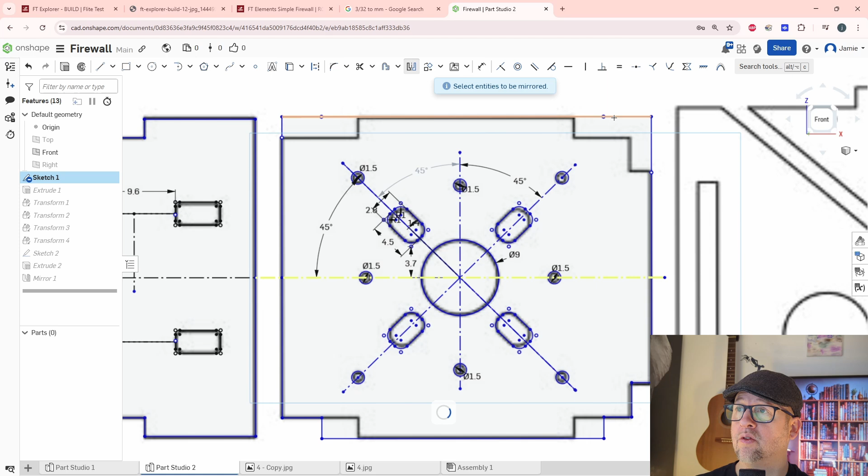Let's go with mirror. Select a mirror line, that's this guy. Entities to be mirrored, this. Okay, it completed it all on the bottom, which is great. Okay, we're done, hitting escape.

Now we're gonna do some trims. Okay, everything looks good there. We're gonna do some trims here. Okay, good there. And now we said that we want to align this guy with this guy. So let's go and do that.

I'm just gonna create some dimensions. So this guy to this guy is 0. And then this guy to this guy is 0. Same thing with the top. So this guy to this guy, 0, perfect. This guy to this guy is 0, perfect.

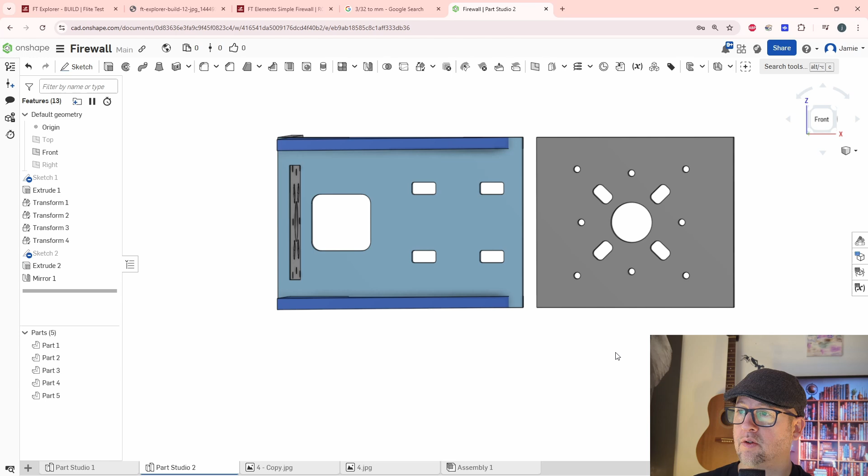And everything else should be perfect, yep. All right, so it should be all on the same edge. So now let's hop out of my sketch. Go look at my... okay, it goofed up, it flipped over my model. Maybe I lost an edge or something, but that's a pretty simple fix. So I will go and rotate it about this line to get it back into position.

So let's do a transform. Transform this guy, rotation point. Lines or points, where do I want to rotate it about? Well, by line, my rotation axis. So this is my axis. And 90 degrees... nope, 180 degrees. Yes. Hit OK. All right, looks like we're in business.

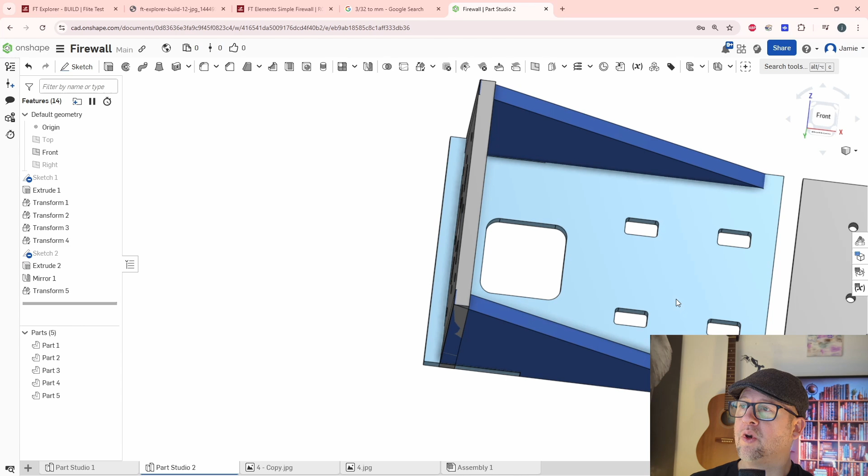We could get rid of that front edge if we wanted to. What if we want to combine all this together? We do a union function. So here's a boolean, and we go boolean union here. So let's unite these guys together. We're keeping everything. It all is one piece, so we don't need to keep tools. So right now it is all one piece.

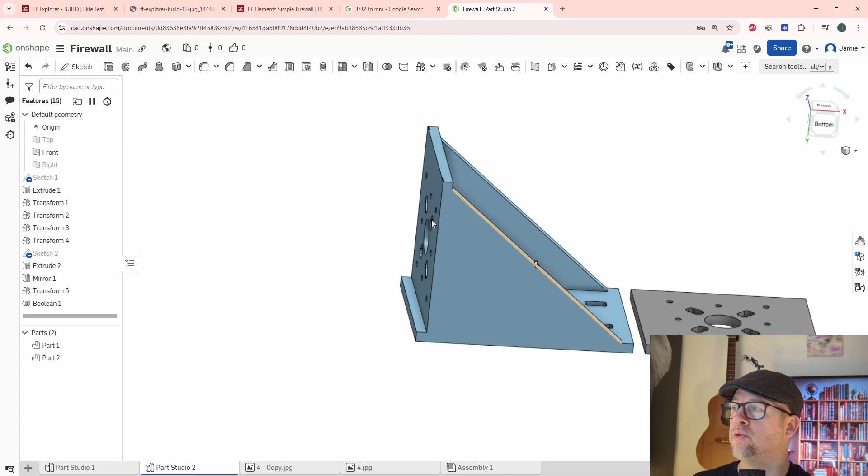You know, if you see a little edge goofy like that, we can trim that. So we can go into sketch and clean that little top portion off, or there's another function we could use, which is called... actually no, the best way to do this is to get into the sketch again. So let's go to sketch, and then we're gonna go, where's that sharp edge? Or actually no, that sharp edge was an extrude, a second sketch that we did.

Yep, so there's that sketch. So we could just trim that guy down and make this square. So let's go and do a bottom view. Okay, I'm just gonna trim that guy down a little bit.

Hit M to get in there. Trim, trim, finish. Let's take a look at our final product. So I just trimmed it a little bit shy of that, which is fine. I'm not so worried about that.

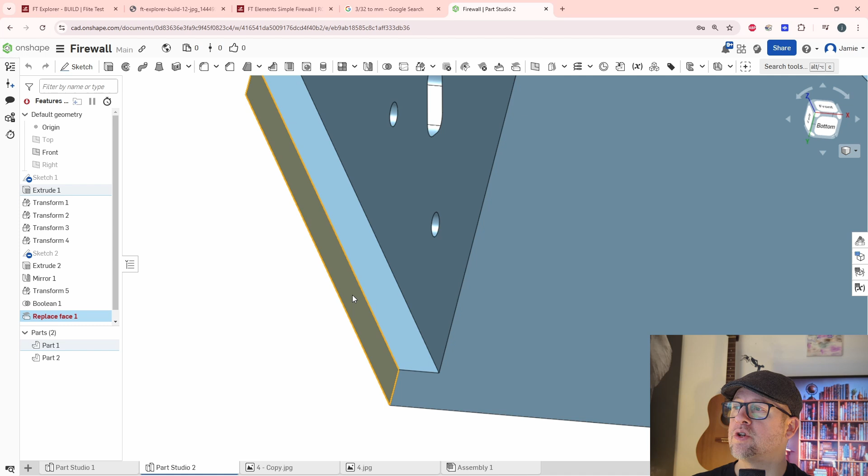If we want to get rid of this front edge, there's an easy function called replace face. This is an advanced function. So click on that face, and the surface to replace with is this face. And bada bing, bada bam, we got our new face.

All right, so here is our body. We don't need this one, so we could hide this guy. We go part 2, gone. All right, so now we got our new PowerPod firewall.

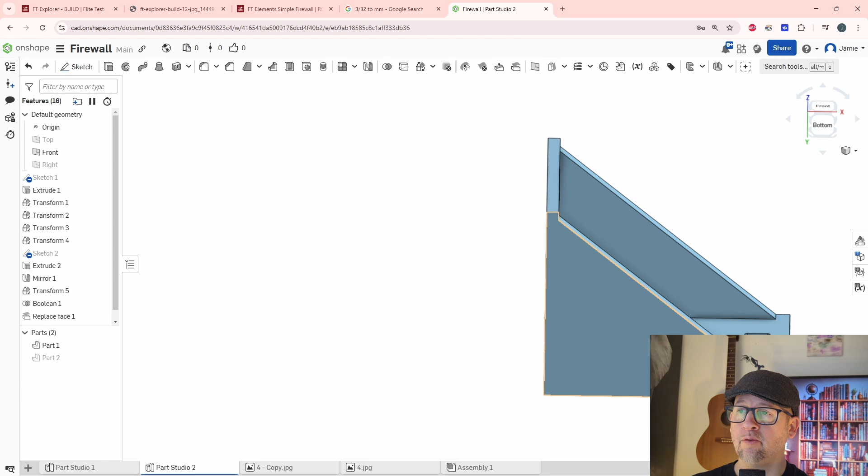Totally adjustable. We have the constraints inside of here, so if we need to modify anything, we can go about modifying anything. If we want to beautify this, make it look pretty, we can add some radii, which I would definitely say add some radii to the inside. These will take a lot of stress, so we definitely don't need 25 millimeters. Maybe like 2 sounds good to me.

Let's see what happens if I click on some of these edges and just make it look pretty, and it's actually going to increase the strength of this print quite a bit. So there we go. Okay, looks good. I don't think any of these will have any interference issues.

Outsides, do we need to make them rounded? We don't actually. We can if we want. There's no problems if we do. But yeah, so this is the final model, I would say.

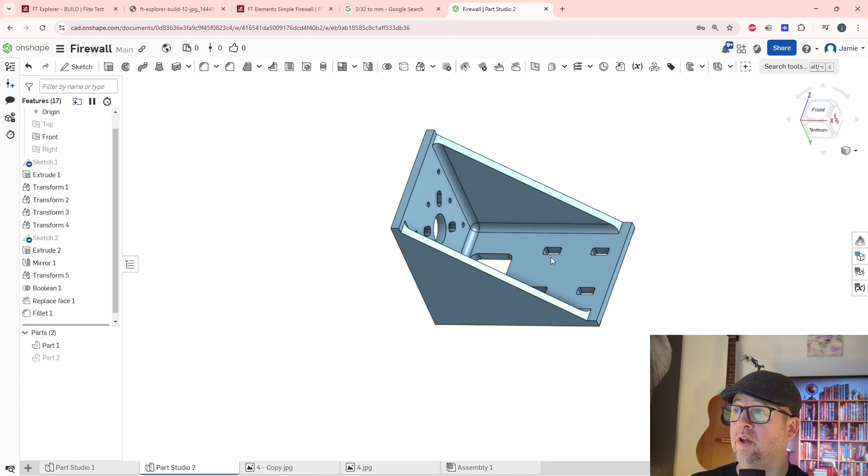And to print this, let's figure out the best method of printing. Let's see. Printers like to be on 45s, but let's see which way. If we print it like this, we're going to have a big piece of support in there, and that's bad.

If we print it like that, I think this probably is the best way to print it. We're looking at top view here, so a printer makes each layer, cuts it here and then builds up this 45-degree edge. So I think laying it on this plane is probably best for printing. That way we don't have any overhangs.

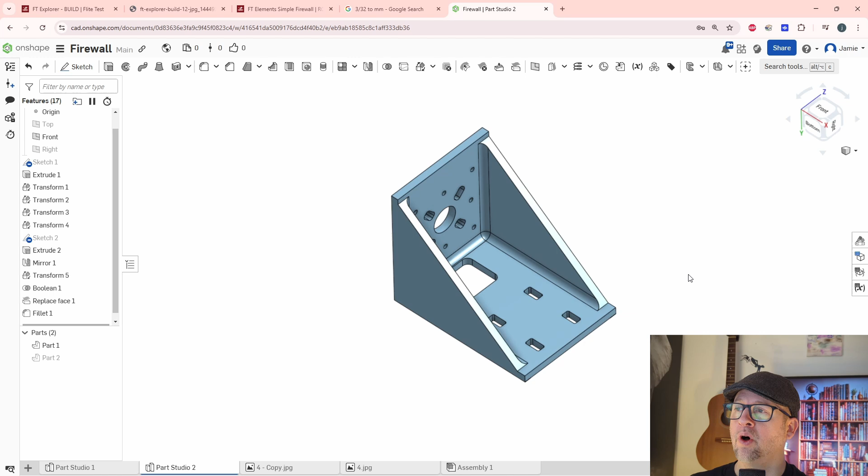Layers will be like this, so we have to think about strength. I actually think it's going to be just fine strength-wise, because we got this huge rib on the outside. It's pretty well constrained. So if we need to add cooling channels or anything like that, we could always — of course the motor is going to be on the other side.

But if you want to make this more lightweight, we can go to our sketch 2. We could actually build a sketch within the sketch. Let's do a bottom view. Let's make a hole, and we'll do an offset here, offset these guys, and then — oops, I double clicked on something wrong there. Let me control Z out of that, get back into my offset, this guy, this guy, this guy. See how it's building it for us, and then this guy.

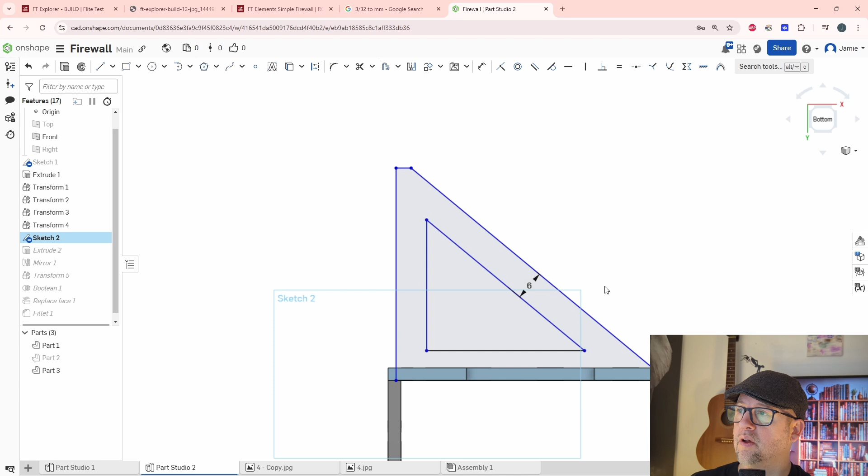Perfect. Now if I want to make it greater than 5, let's left click, let's click on this guy, let's choose 5, I think. Yeah, 6, sure, whatever. 6. All right, let's see what that looks like.

Okay, it just did something I actually didn't want it to do, so I'm going to go back into that tier. Undo, no, redo that last one, which was the radii. I want to add the radii.

Let's go back into this at sketch 2. Let's do the offsets here, here, here. All right, it clicked on something that I didn't want to. So let me undo, Control Z. Let's go back into offset here, here, here, and then here. Perfect. Offset couldn't — okay, it looks like it did.

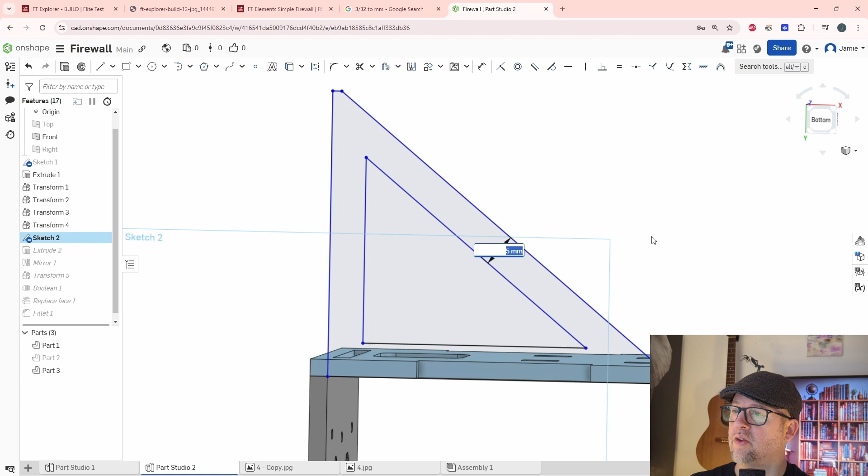Yeah, everything looks fine. I think you're fine. I don't know what it's complaining about. It said offset couldn't be done, but it just did it. All right, so now we got some additional cooling perhaps in there. I think this wall is going to be touching another wall, so I don't think that even matters. But we reduced the weight of it a little bit.

So, all right, so this is the Flite Test power pack firewall, and yeah, highly customizable to your size of whatever hole pattern you want.